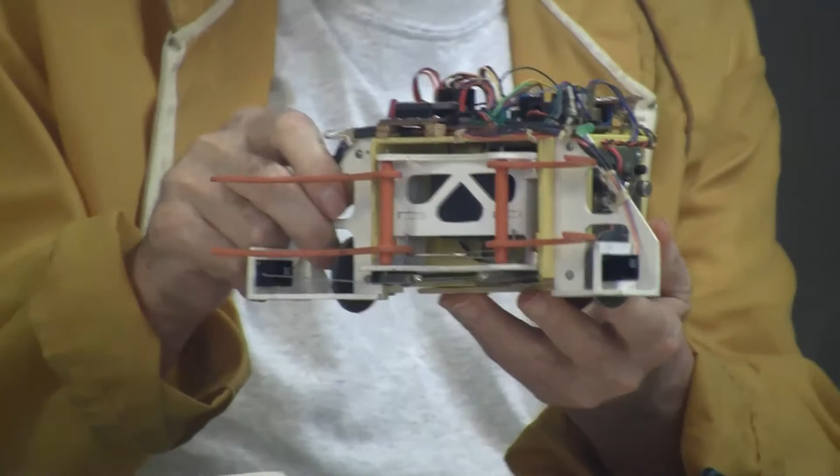It's a small robot, approximately 6 inches, about this big. In fact, this is it. I have modified it a little bit for other purposes, but this is it. It's primarily made out of plywood, and the reason for that is my previous hobby was designing RC airplanes, so I'm well equipped and knowledgeable in handling plywood. Besides that, it's easier to work with and stronger than plastic.

It's got 3 wheels, and the front wheel here is steerable and drivable, has a motor on it, which is a little different from most robots you see now that are differential drive.

There were several reasons for this. One of them is when I built this robot, I wasn't comfortable with trying to come up with a PID loop, and with differential drive you've got to have 2 PID loops. With this kind of arrangement, you don't really have to have a loop on the motor because it runs pretty much constant speed. I used an RC servo to steer it, so I sidestepped a lot of problems I would have had.

The drive motor, a little thing right here - I think that came out of a camera. I bought it from All Electronics.

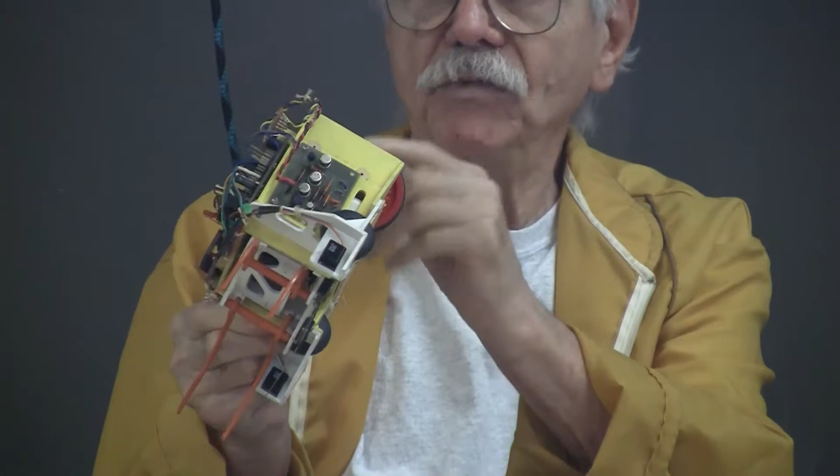It doesn't have an encoder on it, but I put holes in the wheel and have a pair of LEDs and a sensor, so I can at least do some kind of rough encoding.

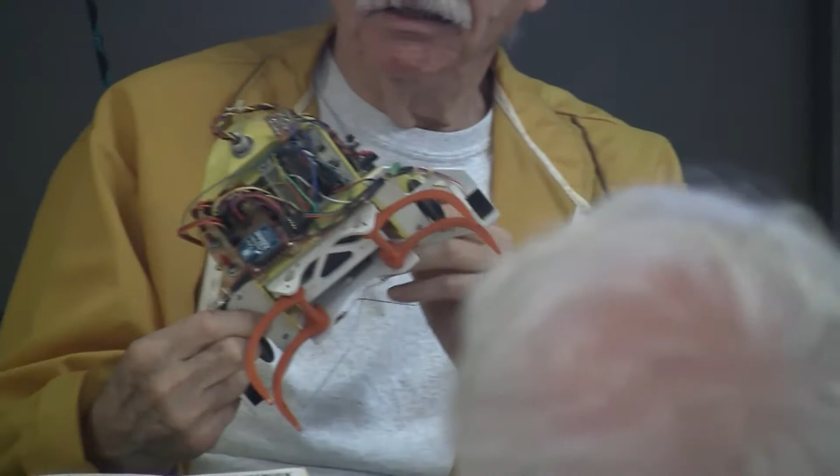It's got an H-bridge with some nice old metal can transistors on it. What's a transistor now? I'm kidding. It's not a vacuum tube?

No, I couldn't quite fit my vacuum tubes in here. As I said, there's an RC servo in there driving it. Power is 5 AA NiCads - there's a pocket under here with 2 of them, a pocket over here with 2, and then one across the bottom.

The brains is an Atmel Mega8 on a proto board that Dale Wheat was selling at the time. It didn't have a whole lot of horsepower, but the board could handle it anyway. It's programmed in C with an add-on that was available at that time to the club, called Atlan. I used a parallel programmer, which one of the club members gave me a schematic for, and I built it up.

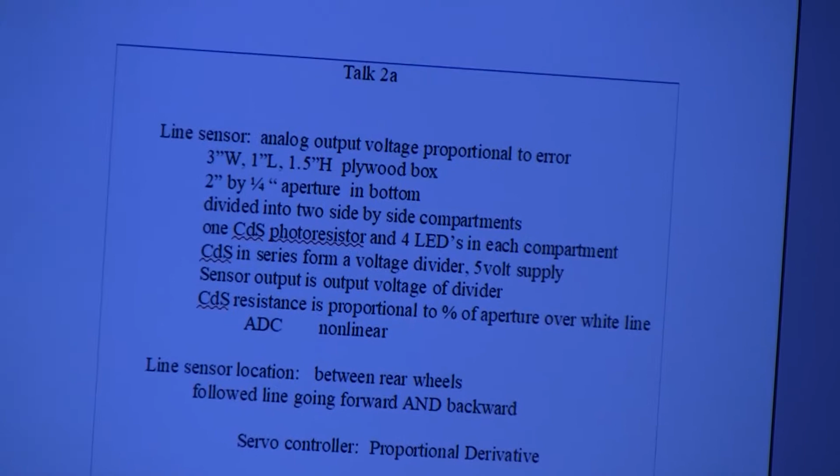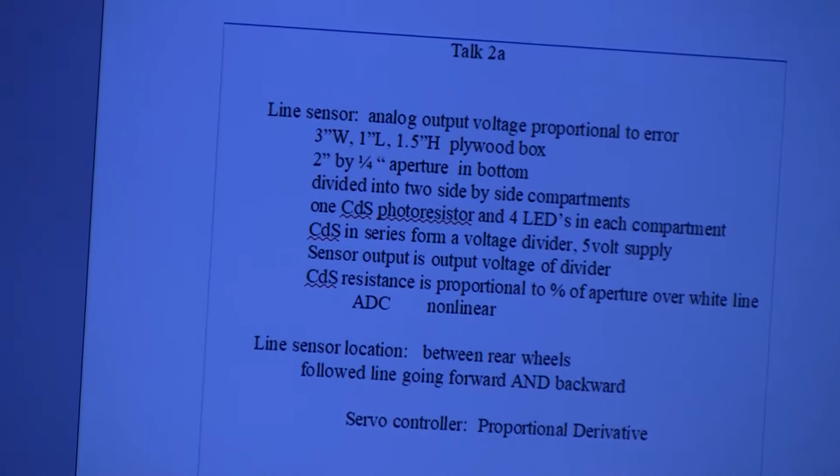The line sensor is kind of interesting, I think. I'll pretty well let y'all read what I said there. But that is the line sensor. My objective was I wanted an output that was continuously variable, proportional to how far I was off the line.

It has a little box divided into two compartments, and there's a cadmium sulfide cell in each compartment. There's 4 LEDs, with a separation between them. The LEDs illuminate the course, and depending on how much of the aperture on the bottom is on the line, that determines how much light is reflected, giving you an output.

Cadmium sulfide cells are hooked in series across 5 volts. The midpoint gives you the difference. It turned out it wasn't exactly linear, so I wrote an equation to straighten it out.

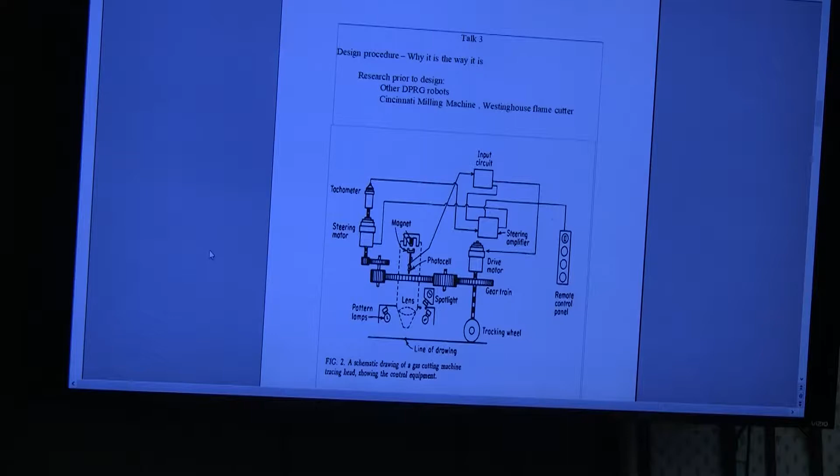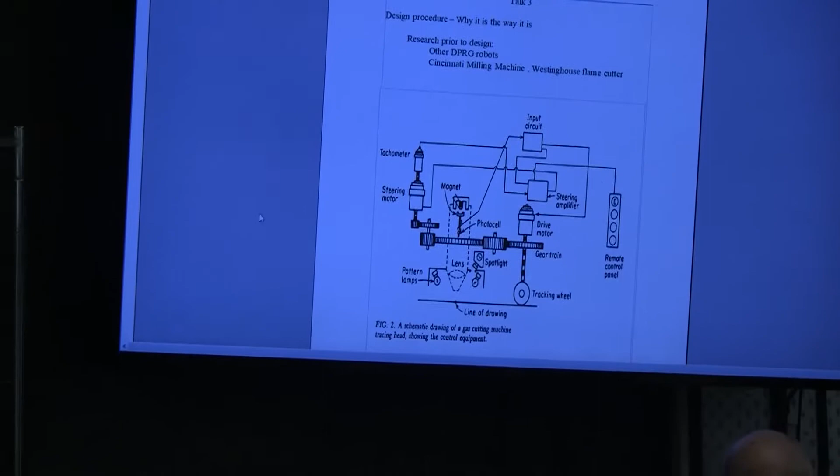Oh, that's tight, they'll come apart. There's no problem there. Anyway, I thought that was kind of interesting. So they would just draw a line on the part? They drew a line on a piece of paper, and then set it on the table or planted on the machine, and the machine followed it and actually milled a part. But the paper's separate? Yeah, like a pantograph sort of thing. So that allows you to freely do free-form design, kind of? Yeah, just free form. Nice, pretty accurate too. Yeah, it's pretty accurate. So this was back in, like I say, about

1955, somewhere along there. I don't remember exactly how they did it, but I thought they had a CRT that was generating a circular scan, and a lens projecting that down on the paper and looking at the reflection off of it.

I collect old magazines. I had a subscription to Control Engineering magazine back then, so I decided to see if I'd saved some of the old articles. I tried to find the article, but I didn't. I ran across another article for a flame cutting machine - they use a cutting torch to cut out steel parts. This was a design for how it worked. I thought that was interesting.

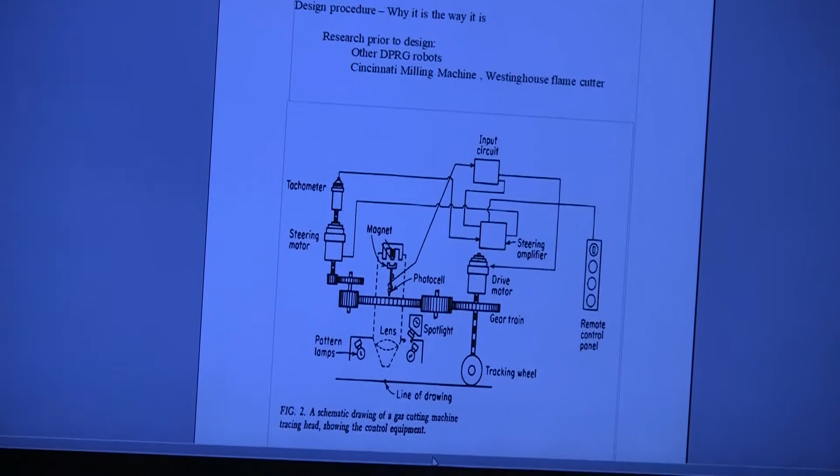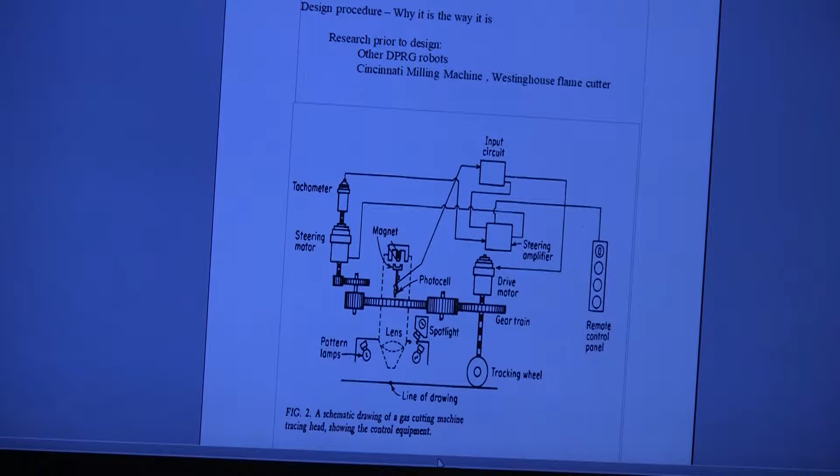Kind of off the subject a little bit, but interesting. You'll notice the servo motors back then very seldom used DC motors - they used two-phase AC motors. On a two-phase servo motor, you put a fixed voltage on one phase, and then a variable voltage on the other phase, and whether it was in phase or actually changed 180 degrees out of phase determined the direction.

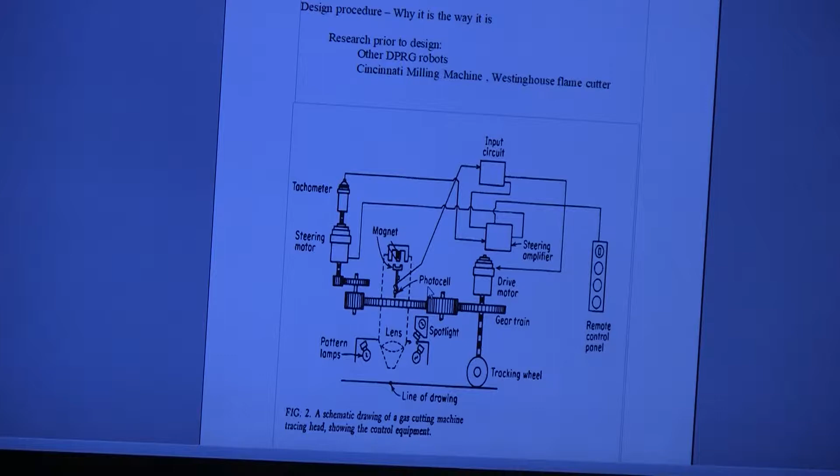Anyway, these had phase, and the interesting thing about this is the line sensor. Apparently there's a photocell with an arm that hangs down, with the photocell on the bottom of it, and there's an electromagnet up top which made it swing back and forth. Then there's a lens projecting an image onto the photocell as it swings across the line.

The interesting thing to me is how they generated that control winding phase. It turns out that if you got a symmetrical waveform and do a Fourier transform on it, you don't get any of the signal necessary to drive the motor. But if the notch moves off, it becomes unsymmetrical, and that introduces the control signal.

Also notice the steering motor's got a tachometer on it rather than an optical encoder. Here's another important difference: they're using a steering motor, which means the speed is more or less proportional to the error. Whereas on this servo, the angle is proportional to the error.

Most people use differential drive. As far as I can tell, if you use differential drive, to accomplish essentially what I have here, you have to have a velocity loop around each wheel. So you need a speed control on each wheel, and then your error drives the difference between those two speeds.

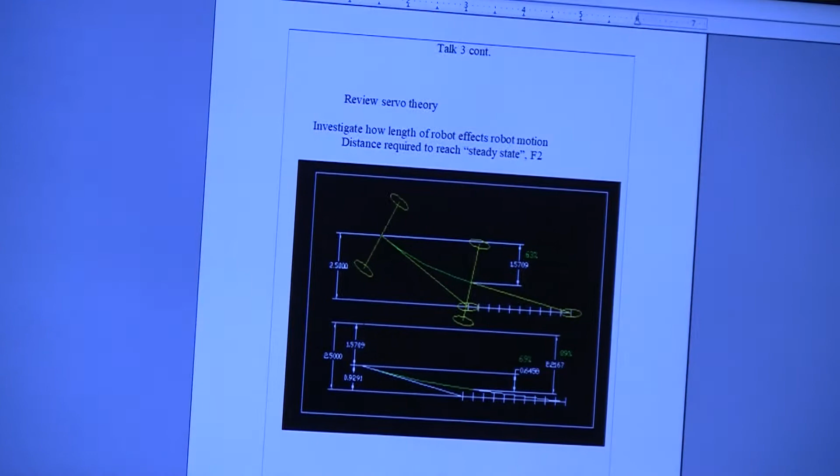Next slide. The next thing I investigated was how long should the robot be. There seemed to be an opinion at that time, at least by one member, that the longer the better. But I did a few things to try to understand what might be the better choice.

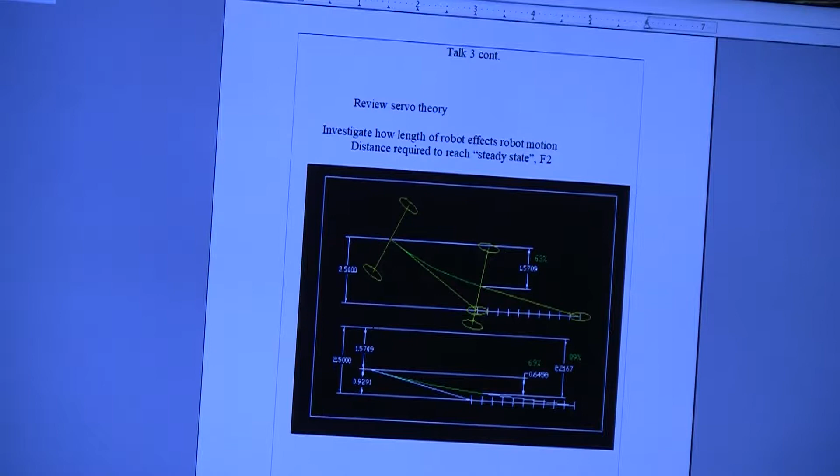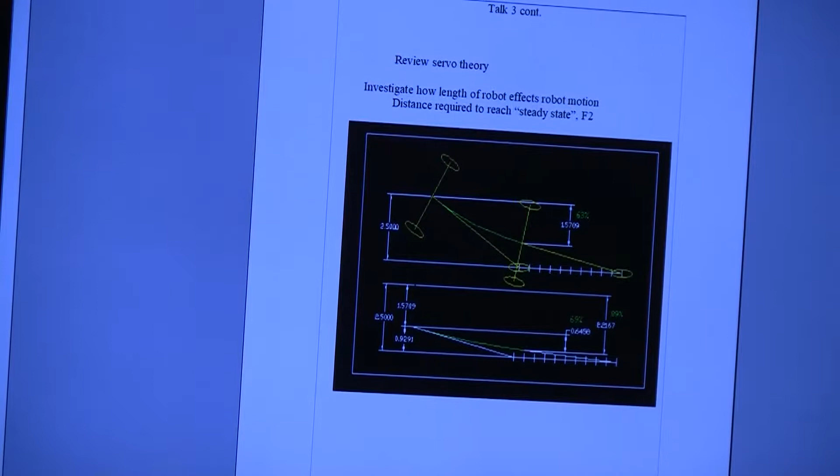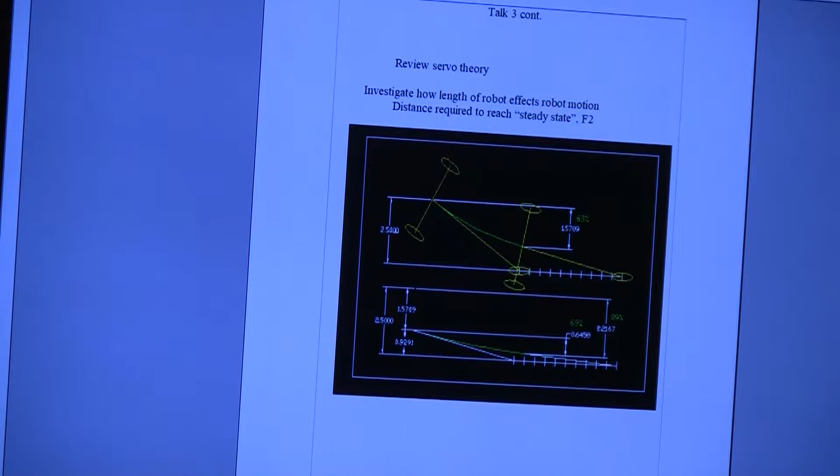One question I asked is: if I set the robot down where it's not on the line, but the sensor is on the line, and the sensor follows the line, how long does it take the robot to line up with the line? That's what this diagram shows. The top diagram shows the three-wheeled robot in a start position and an end position. The robot is 5 inches long, offset by half of that. The front wheel is on the line, and then the robot moves forward 5 inches, the length of the robot. The green line shows the path the robot takes, and you'll see it went about 63% of the way towards the line.

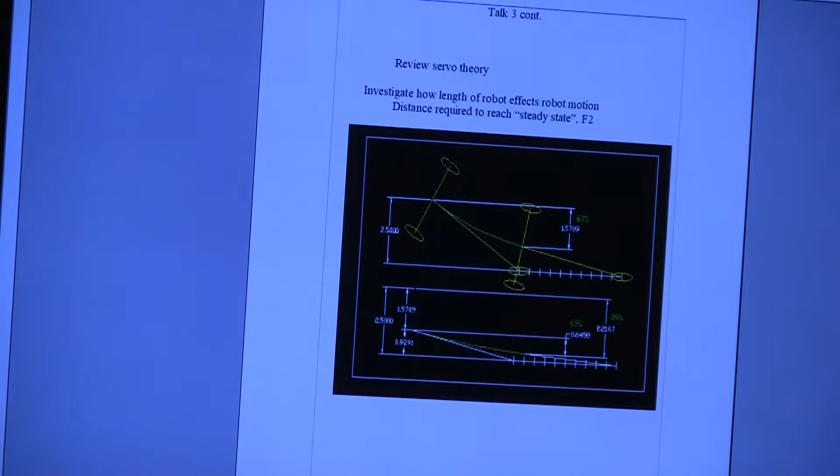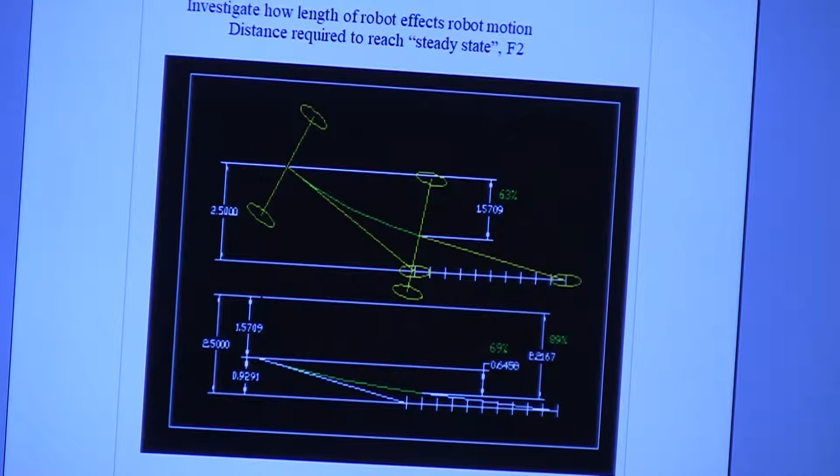The next diagram is basically just a continuation. In the next 5 inches the robot moved, it moved another 63% of what it started out with, for a total of about 89%, which says that if the robot starts out at an angle like that, it's going to be pretty well lined up when the robot has moved 2 lengths. I felt this was important because each time the robot came to a change in the path, from a straight line to a curve, that represented a step input to the servo. I felt it was probably a good idea that the servo settled out before it hit the next curve.

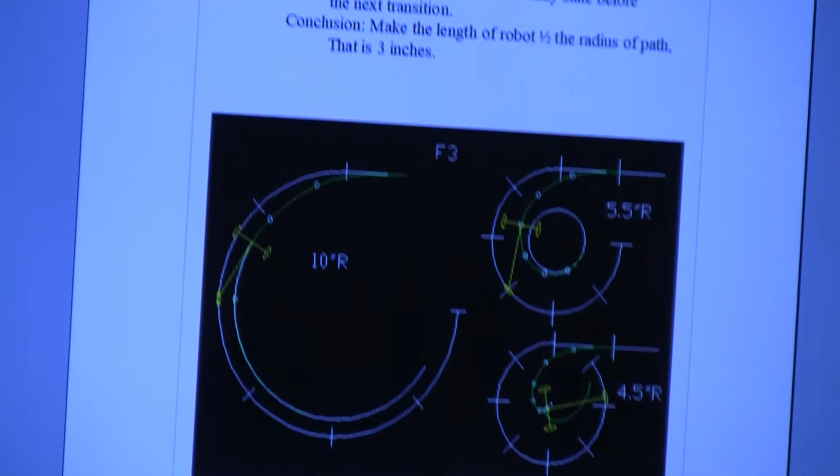So the next thing I asked is what happens when you go from a straight line to a curve. I drew this for several different radiuses. The big one here is a 10-inch radius, twice the length of the robot. It starts out straight at the top, and you can see the green line settles down to a circular path offset from the path. It settles down after roughly a quarter of a turn, thereabouts.

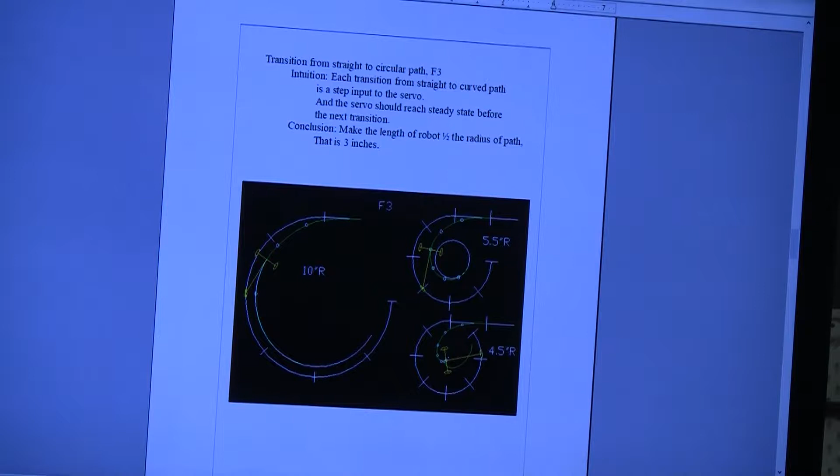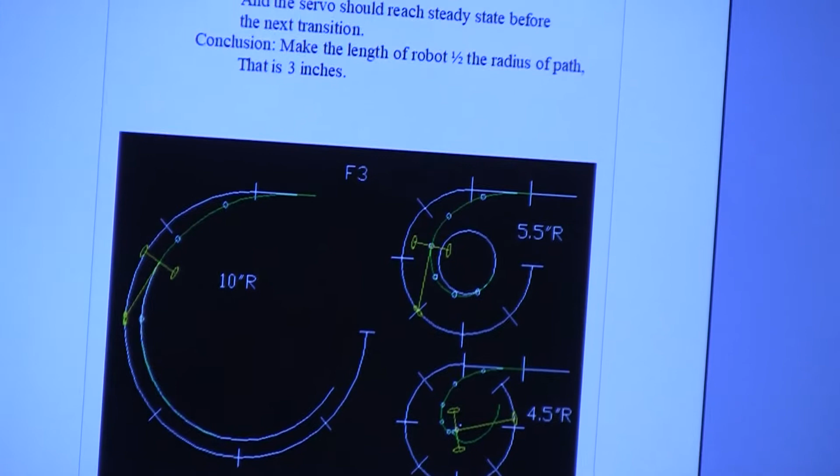The next smaller one is a 5.5-inch radius, just a little more than the length of the robot. It does settle down, but the robot has to go almost 3/4 of a circle before it settles down. Then the next one shows what happens if the circle radius is smaller than that. The answer is it kind of goes crazy.

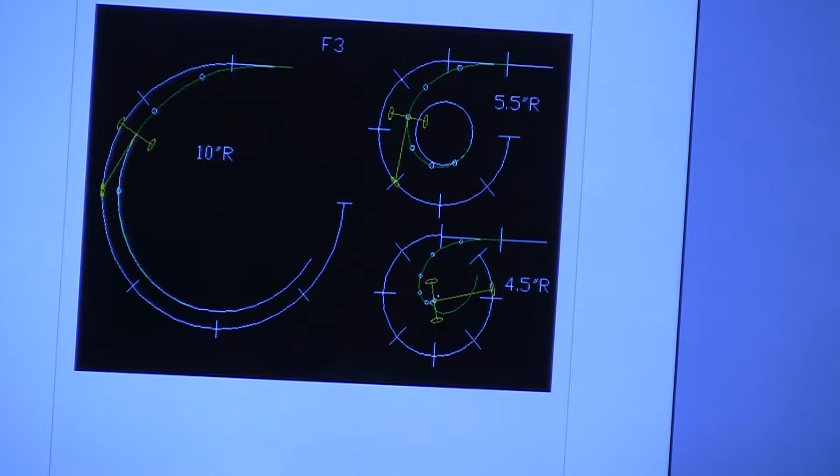In fact, you'll see it will go around until it finally gets to where the robot is basically perpendicular to the line, which is another important point. If you've got a line sensor that's a straight line, your line sensor is now not perpendicular crossways to your line, it's lined up with it. So basically, it doesn't know where to go. So I guess next slide, yeah.

These diagrams are great. I love this analysis. I'm just curious, how did you draw these, or how did you get these graphs? It's a trade secret. No. Well, if I was a guru like this guy, I'd simulate it. And since I'm not a programming guru, and at that time particularly I'm not very much a guru, what I

did is I got me a piece of wood. Excellent. And put my wheel on the back of it, a stick on the front of it, and I drew me a path, and I held it on the paper, and I followed that line with my pointer and watched what the wheel did. That's a simulation, by the way. Yeah. That's beautiful. So actually, I did that a long time ago. And I lost it.

So I built another one. This time I got fancy. I actually made a triangular shaped piece of wood, put two wheels on it, and a nail for it. And then I drilled a hole and put a pencil in it, so I could put it on there and trace it around. Draw the path. Anyway, that's how I did it.

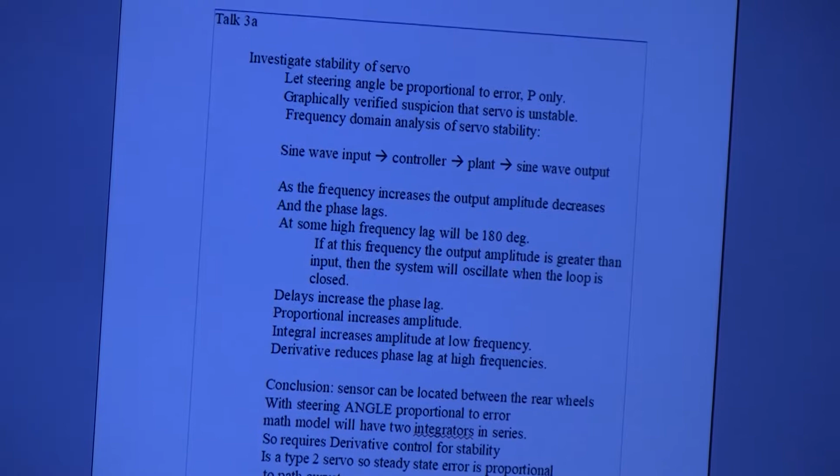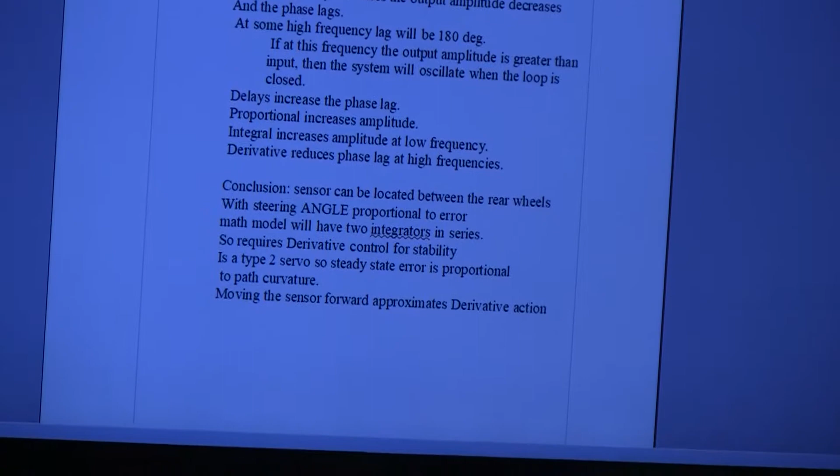I'm talking. All right, the next thing I began to think about is basically the stability of the servo. Would it oscillate? In other words, if I made the angle of the steering proportional to the error, would the servo oscillate? And I suspected it would. And so I graphically determined that it was unstable.

And for you, Clay, the way I graphically determined it, I got on AutoCAD, I drew this robot there, and I said, okay, it moved in the direction the wheels are pointed. So I moved it a little bit, I drew it again, moved it a little bit, drew it again. And I started off, I think I had a curve.

And it went along here, it closed in on the curve, it overshot the curve, it went beyond the curve back, and overshot, and each time it overshot, it got further away. Yeah. Oops. So I figured, well, it's probably going to be unstable. All right, so basically, what I did

back in the 50s when I was in college, I took a servo course. I'm not sure I learned a whole lot about it, but I got a book out of it. And so I sat down and kind of reviewed the book as best I could. And back in those days, it was talking about frequency domain analysis. And for at least one of you in here that doesn't know what the frequency domain is all about, the reason I want to mention this is because I think it brings out a couple of points that are kind of interesting.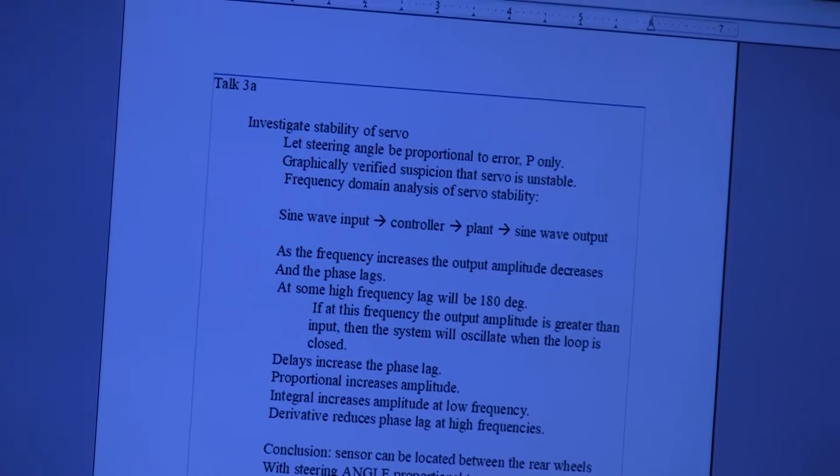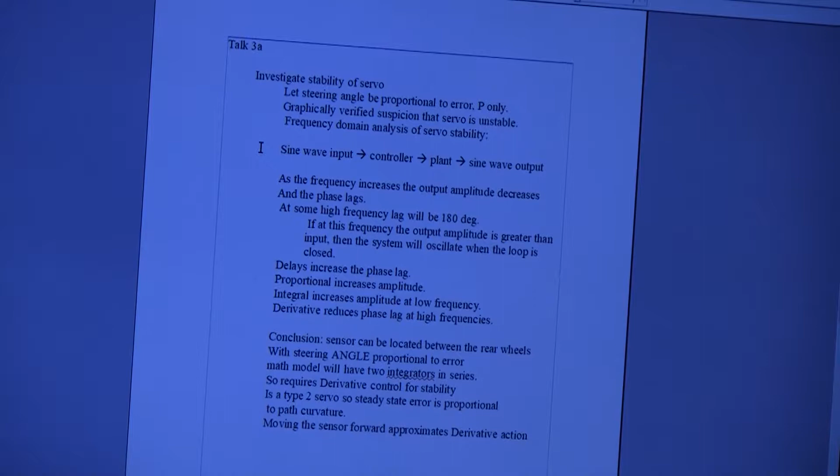Basically, one of them, poles and zeros. Yeah, there's a line there where I've got sine wave and error and a controller and a plant. I tried to draw a box around the controller and plant, and I wound up erasing my work. Yeah. But anyway, what I'm trying to show there is, if you take your servo or your plant, by the way, plant's a fancy word several people use for the actual robot, the mechanics of it.

Okay, if you have the actual plant, put the exact robot controller in front of it, and you took a signal generator and fed that signal into the closed loop system, but you broke the feedback loop, so it was open loop. So you feed the sinusoidal signal into it, and you look at the signal coming out. The signal coming out is going to be the same frequency as what you put in, but it's going to be a different amplitude, and the phase is going to shift.

At low and medium frequencies, amplitude will vary around and everything, but eventually it starts nosediving. As it starts going down, the amplitude goes down, and the phase shift lags further and further behind. At some frequency, the phase shift is 180 degrees. So when you connect the loop, what you thought was negative feedback becomes positive feedback. It's an oscillator. So you want the amplitude of the system to be less than 1 when the phase goes to 180. So that's the concept of frequency.

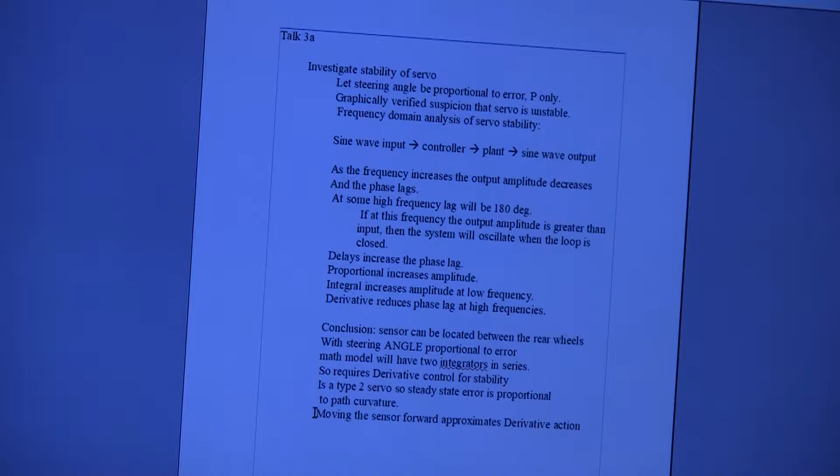Let's see, where am I? All right. So I guess my conclusions were basically, it should be possible to put the sensor between the rear wheels. And let's see, what else did I include? If you make the steering proportional to the error, you come up with a Type 2 servo.

Now, what's a Type 2 servo? Well, basically, one of the answers is how many integrators do you have in it? I've got two integrators, so it's a Type 2 servo. But there's the other kind of definition of a Type 2 servo. A Type 0 servo is if you have a constant input, your servo requires a constant output. There's a little error, a constant error.

In other words, if you're trying to heat the room, you've got to have a little difference to keep the furnace on. So a Type 0, there's a constant error if the input is constant. A Type 1, you have a constant error if the input is a ramp, linear. And a Type 2 is that you've got a constant acceleration. Well, it turns out that going around a curve on the course is a constant acceleration. So it says it needs to be a Type 2.

The other thing is just looking at the robot. It says if I'm going to go around a curve, I've got to maintain a constant steering angle. So if the steering is proportional to error, I've got to have an error. So basically, all of that says it's a Type 2 servo. And that's why I call it T2LS. Yeah. Type 2 linear servo. There you go.

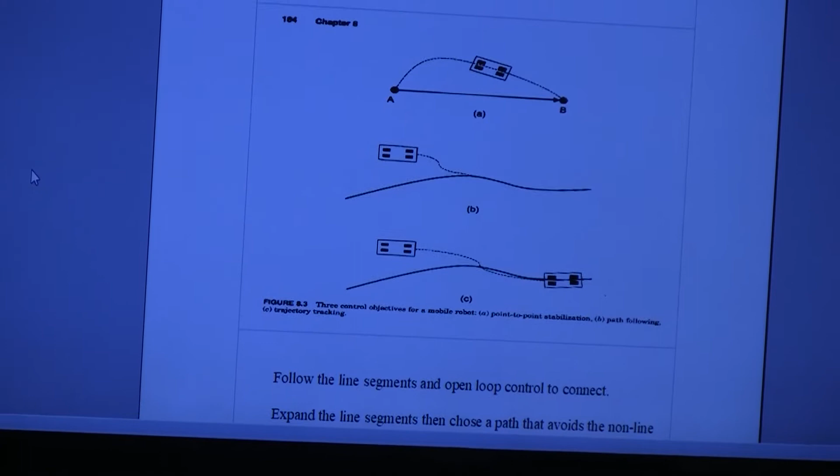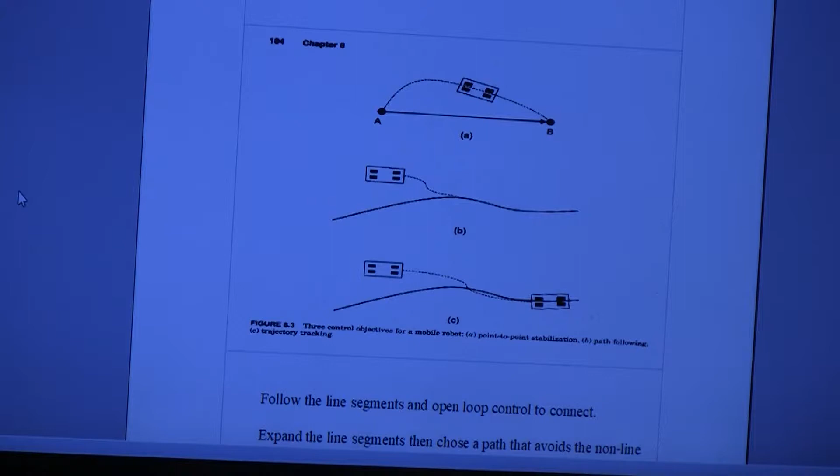So basically my point here is the DPRG course is not really a line follower. The closest name I can come up with for it is a route follower. And what's the difference, what is a route? You go from here to there, kind of follow, but you don't necessarily follow the line or a particular track. So basically the question is, what do you do about it? How do you handle this problem? What capabilities do you have to incorporate into the robot? That's the subject of my speculation.

In this book here, which, by the way, is an interesting book. I found a couple of what I think are stupid errors, so I kind of need to question some of the things. I think it was written by a professor and one of his students, so maybe the student part. Show it to the camera. Can the camera see? Mobile robotic car design.

But it's pretty interesting. It does have a more complex model for the robot, and it also talks about when you use a camera to detect the line, how to transform it back. To be honest, I haven't read that part, so I don't know exactly what it's saying. Anyway,

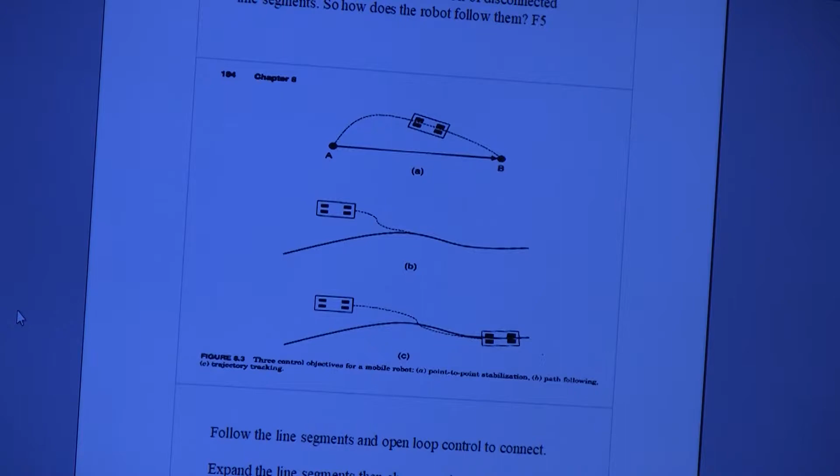they made the point that there's basically three different ways to get from here to there. One is just a waypoint: the only requirement is you start here and you wind up there. The other is basically following the line. And the third one is where you're trying to track something. And if I'm not mistaken, I think Carl basically took the first approach. He set a bunch of waypoints on his line, and then moved to each. Am I wrong or right?

Sort of. Well, it's more like a combination of A and B, because the camera would look at the scene, and then based on that scene and recent scenes, it would say the most appropriate place to aim in that current image is here. And at that point, it would shut its eyes and then just attempt to go some fraction of that heading. So basically, you're doing the first.

As much as you can. The first was how the commands were given to the wheels, but the determination of where point B is relative to A was more like B or C. Okay. Well, anyway, the one point is you determine the waypoint, and then aim your robot and go do it. That's one approach, and that works even though your line is not continuous. It's got sharp corners, because you're just going. But it's difficult to figure out where it should aim.

Well, that's hard, and I would guess it's probably some kind of first order loop, right? There's no deterministic algorithm for the control loop. Once you set the point, it's ballistic. No, you can servo it to that point. You can close the loop around it. Then the last one there is similar to that, except instead of your target jumping like that, it continuously moves. And in both cases, the robot doesn't necessarily follow the line.

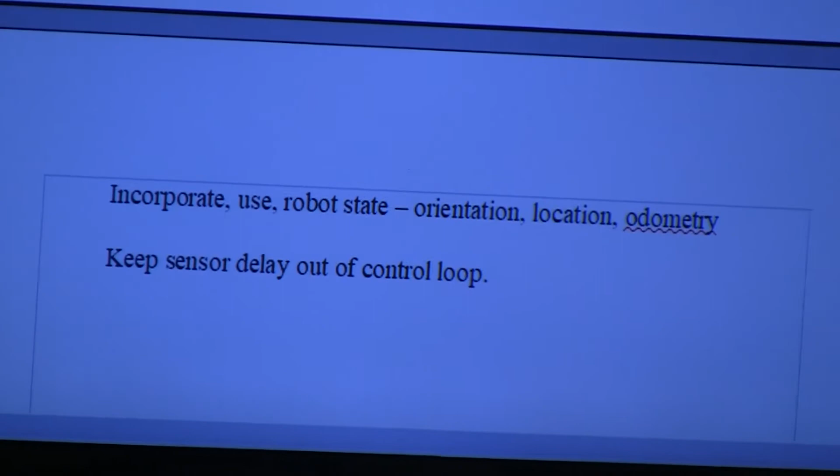It's just a little description of what it is. And really, what Will's proposing there, if I've got it right, is if you did have a model of the course that you're referencing - sort of like Tesla car driving, where you've got GPS information about where the roads are - it's not a trivial task to do what Will's talking about, which is look for what did you call them, landmarks, and correlate your model with what you're seeing and where you are and all that. That's a good problem to solve.

And that's what's being done in these self-driving cars. They're not just out there driving the roads. They're weighing up what the GPS is telling them and looking at their road map. And if there's a discrepancy, I'm sure they get nervous - you know, Google says the road turns left here with such and such a radius, and I don't see it. I'm probably going to put the brakes on.

Recalculating, yeah. Anyway, that's what's fun about this. And what I'm just saying is, when we first started this path, this journey with the challenge course back in 2011, I don't think anybody thought it was going to be as hard as it was.

I thought it was hard because it didn't look like something that could be solved right away, and I'd rely on being able to sit down for a few days. Otherwise, go back to it after a year or whatever. And I just wanted to make an observation.

One of the things I love about the club is a really great presentation that morphs off into discussion, which is really interesting. The other thing I'd say too is that there's a lot of different people going at it in a lot of different ways, and I think that's good too.

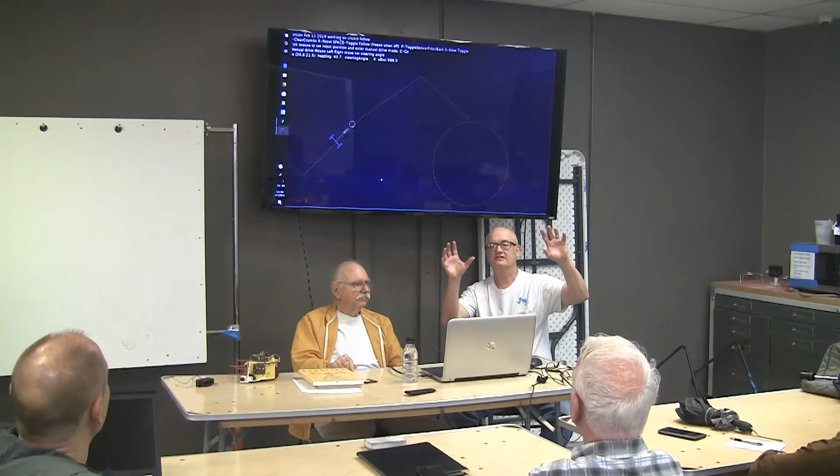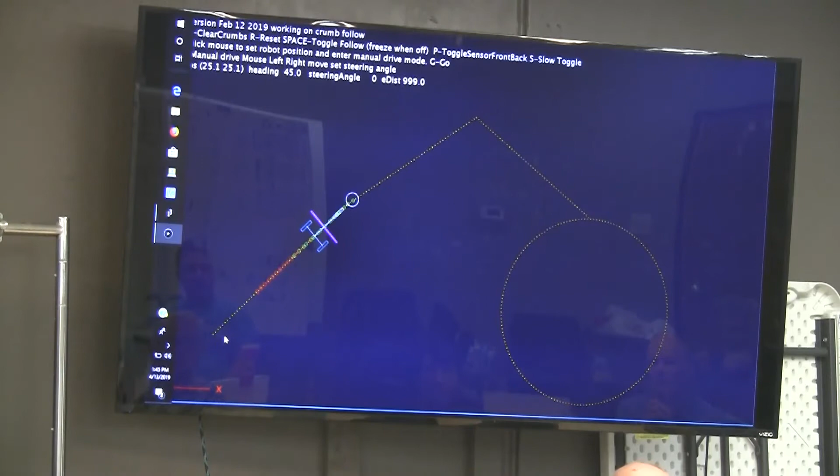That makes sense. And that line, in this diagram—when I reset it, you'll see green little circles. Those are the camera-sensed cookie crumbs. Can you tell us what this is written in? Processing—I published it to my GitHub, so you can pull this and look at it. I was going to talk about it, but I don't know if we'll have time today. So the crumbs are the line? The green ones, yeah, are the cookie crumbs, and that circle is sort of the detector, which is like maybe a video camera.

But the magenta line that you're seeing across the robot, that's a virtual sensor—let's see if we're tracking at the moment. Hang on, let me reset, I slowed it down. Okay, hang on, let's see. Oh, maybe because I'm going slow. But that magenta line is a virtual sensor. So, are we tracking? No, hang on, okay—it runs as well as your robots, Ron. It's a good simulation. Yeah, perfect simulation. I know, the space bar toggles follow.

So what's happening is that you can see the camera is picking up the line way out in front of the robot, but we're dropping those crumbs into a world coordinate system, which we know where the robot is in. And those magenta dots, the sensor doesn't actually exist there, but it's our virtual sensor in this case. You can place that anywhere, between the wheels, wherever you want.

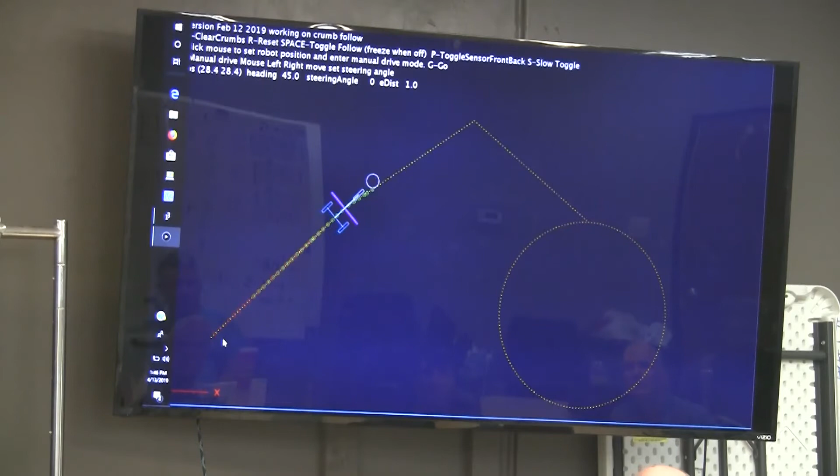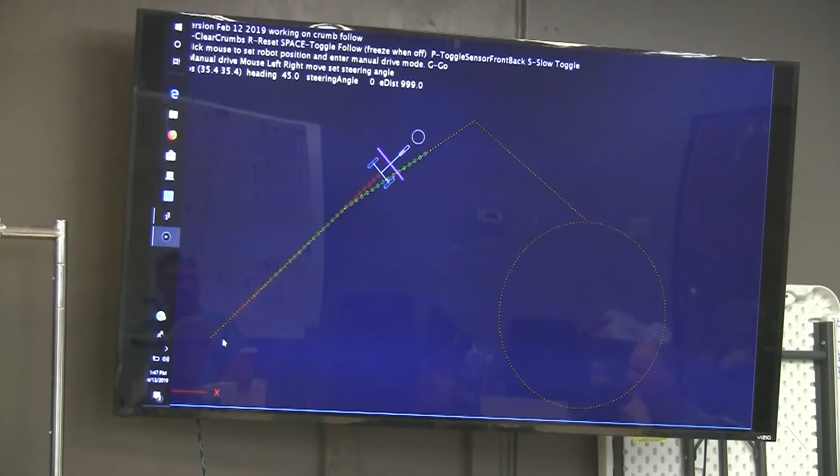Wait a minute, the robot's spazzing out. The robot went away, but the dots kept falling. Wait a minute. I'm fading, okay, it's a little tough for that. You get a loop issue, kind of a hard bend there. Let's see, did I add any gain onto the turn? Slow it down, hang on. He's lost it. Just a few more adjustments to the code, hang on, let's see. It needs some more D in that thing. Yeah, crank up the derivative.

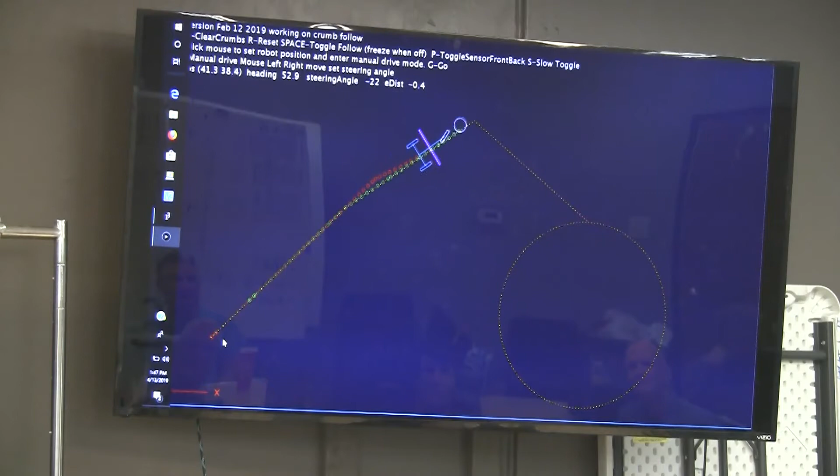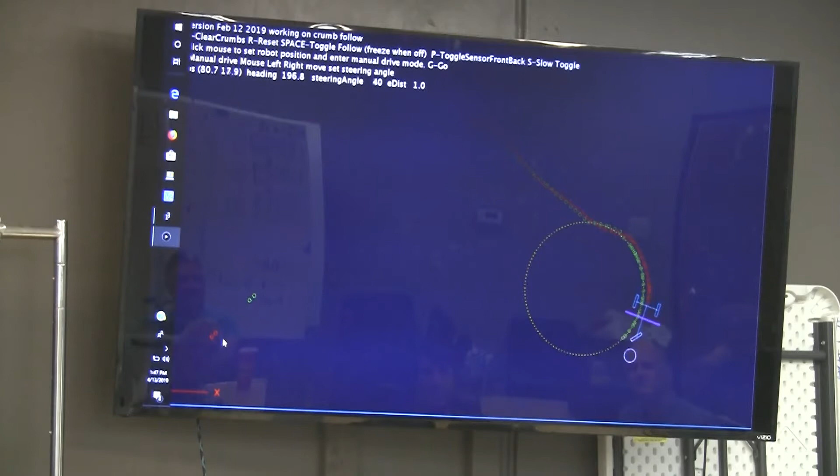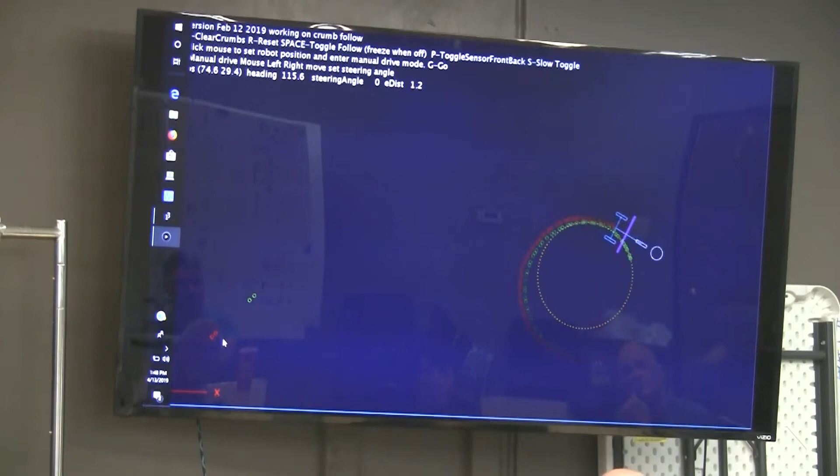In other words, the detected crumbs are dropped into the world coordinate system. Imagine as if you literally dropped a cookie crumb where that camera was seeing. And then the sensor back there gets to see those cookie crumbs. You don't have to do it in reality - like Will was saying, invisible lines aren't bad.

But isn't the circle what the camera is seeing, the line? Yes. I'm confused there - so as you're going around this spiral here, the camera hasn't seen any of the cookie crumbs, so how? No, no, what it's doing - sorry, it looks a little confusing. The circle, we're computing the nearest point on the line, we'll say, which is the yellow dots. The nearest point - hang on, let me reset the thing.

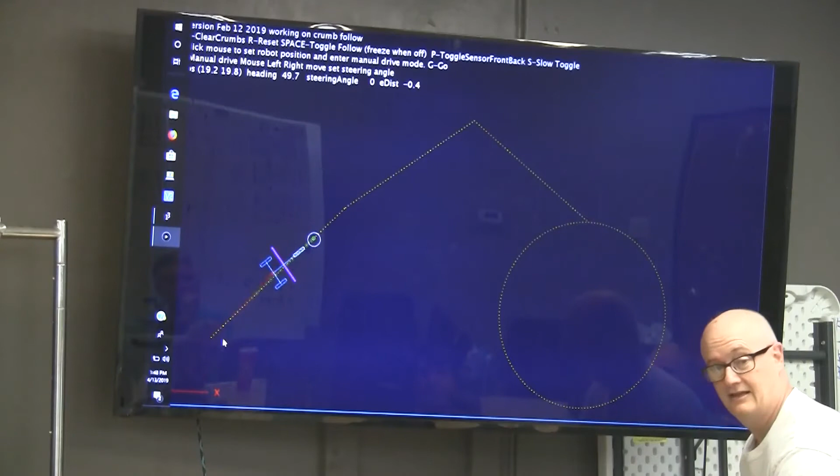Okay, so in other words, I'll freeze it, let's see. Just a second, let me just point - the line is your sensors, right? Yeah, so anyway, these yellow dots indicate a line. Now we could get cute here and draw a physical line and physically process the image or whatever, no big deal. But so for this illustration, the yellow dots indicate where the line really is, and that we'll say is in world coordinates.

And I'll say something here in a second, but right now, the closest line point to this circle is that right there, and there's the green dot. I'm now calling that a cookie crumb. But that cookie crumb, we calculate based on where the robot is. The robot - and this is a little tricky - because we put it in a world coordinate system. The problem is, as the robot drives along, because odometry isn't perfect, a robot driving around in this room might slowly build up error.

But with respect to this, what's really important here is the camera sees this point, and this point is 10 inches out in front of the robot. The cool thing is that if the robot thinks I'm here at, I don't know, 0, 20 or whatever in the XY coordinates, and 10 units out ahead is that cookie crumb, it can now position that in the world coordinates, and it's pretty accurate - real accurate, in fact.

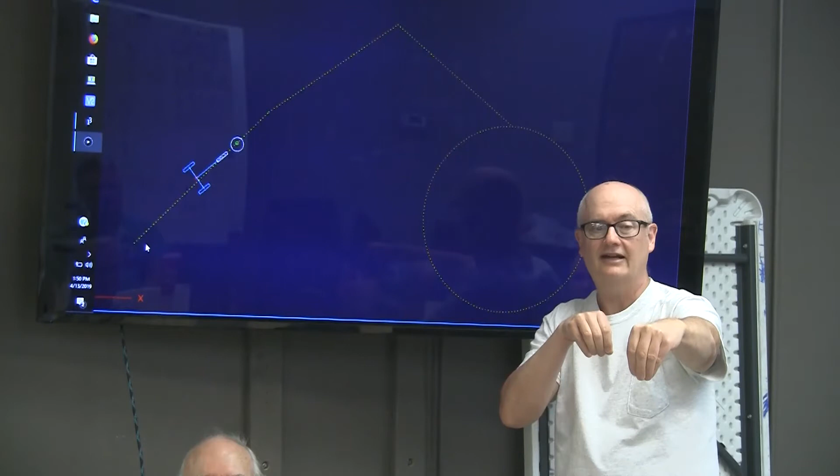And what we're really worried about is just for the time that that robot is going to drive about the next, we'll say, 6 inches, is what really matters. Yeah. And so what we're doing is we're able to put a point and know exactly where it is with respect to the robot and drop it into a physical list such that we can drive along and follow those virtual cookie crumbs as if they were real, because for all practical purposes, they are. In other words, we're storing them in memory.

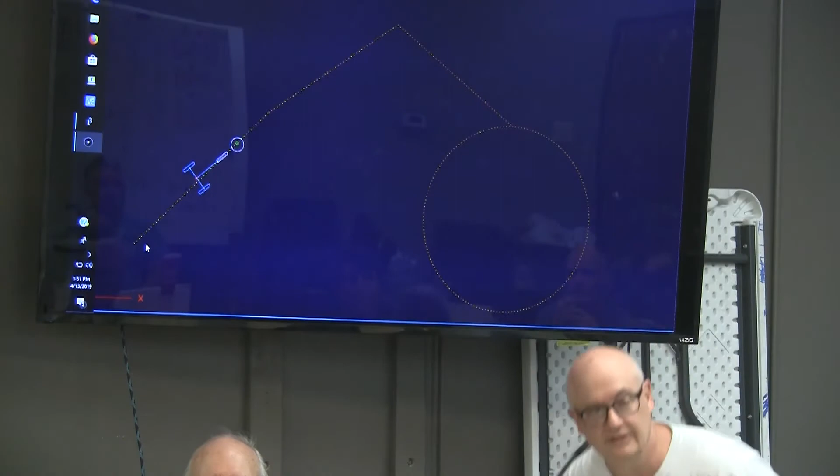It doesn't matter. Okay. Now, does that matter? Let me put it a little different. The robot is detecting the line out in front. Yep. And it's doing it in robot coordinates. Yep. But the robot knows its position in the world. Yeah. And so that point is transferred to world coordinates. Mhm. So it's now stored that point in world coordinates.

The robot moves, detects another point, stores that point in world coordinates. So it's creating a map in world coordinates. Then the robot is moving, the virtual detector back here is taking that line. It's stored in world coordinates, converting it to robot coordinates. Well, not this program, but that's okay. You could do it that way. Converts it into robot coordinates and then sees how close the robot is to that line.

Now, if I understand, what's the sensor up there in your picture? That's the purple one. There's two sensors. The one in front is kind of hokey, let's put it that way. Okay. Well, I could show you this in a real beautiful OpenGL 3D simulation if you want to see that. No, but where is its field of view?

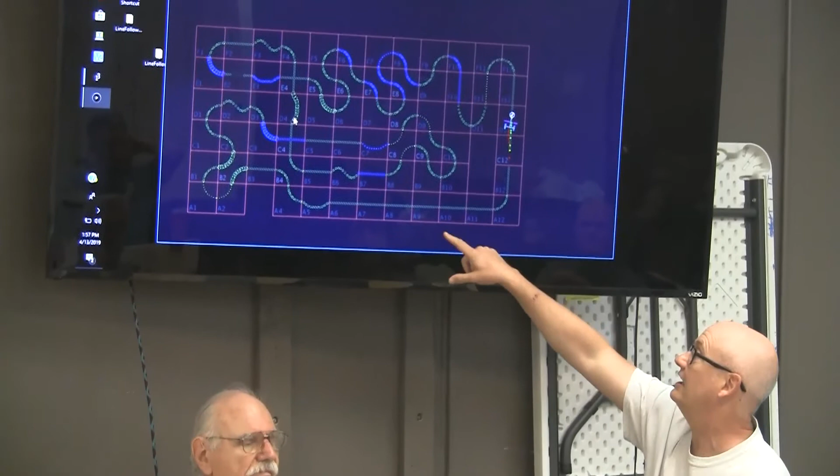Now, the other thing is perceiving where we think the path should be, because obviously I've idealized, like the S curves, I've faked them a little bit. I've made them into something that's more followable, and Will made a perfect one.

Running out of time? Well, no, what's going on? No, you got plenty of time. Well, let me see. Oh, okay. Oh, you need to go. Yeah, I got it. See you. Thanks a lot. Oh, you bet.

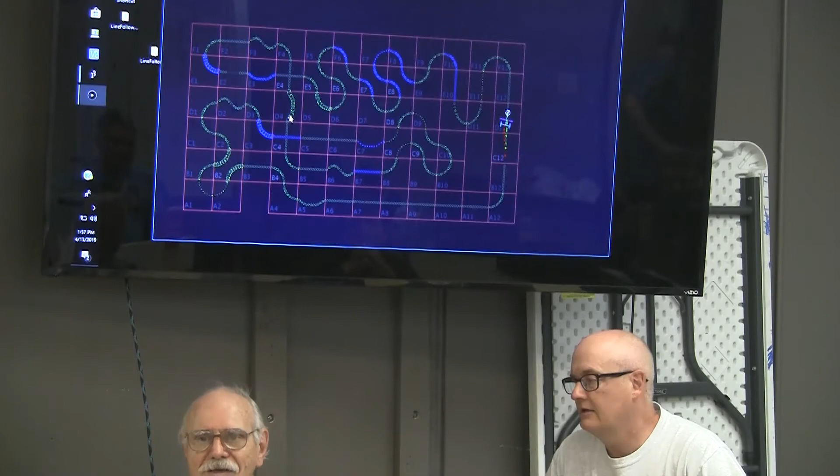This sensor that he's got in front, in my opinion, it's hokey. But what I've started messing with, and I don't know how well it'll work, is a line sensor that's an arc. And I think it needs to be close to a 180 degree arc, a half circle, with the center of the arc approximately at the virtual center, the turning radius. So that the distance from that point to the virtual center is basically the same. And this curved sensor then moves along the line.

Most of the time it crosses the line once. But there are cases when you get an acute angle, and it actually crosses the line three times. But you're only looking for the one closest to the center, because if you just plot that one, the closest to the middle, when you come to that point with the curved arc,

It'll close up quickly. No, it won't. You got the one over here, but the first one out from the center is the closest point on the line. They're both on the line, but the first one on the arc is the first one you come to when you're going on. I think basically that. Okay.

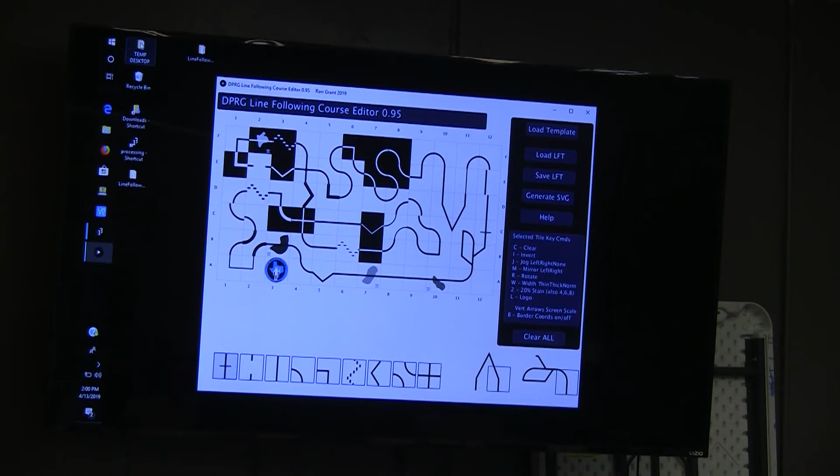That's cool. And I guess where you have a gap, you just keep going. Yes. Well, that's the ideal way, because that's part of what you do. Your internal map will have a gap in it. But one of the things you know is that they're kind of spread in time. So all you really want to do is put some points that connect it in your list that are not spaced too far apart. And that brings up the question, how do you store the internal map?

This program basically treats it as a bunch of points, XY in known world space. Or robot space. Or robot space. But then you want to get more sophisticated and have a continuous line.

You know, if you did have a sensor that was like an arc, like a radius of 180 degrees, I think that would work at catching all those acute angles easily, because you could come up and it would just shift from the center sensor off to either the left or the right, but it would still sense it. It's not like it would all of a sudden be there and then disappear, if you had sensors all in a line.

That's a neat thing. I wonder if we could do that with our cameras, though. That's a little more difficult. Yeah, no, that wouldn't be hard at all. To sense, I guess you'd have to do line segments, or specific pixels. You'd have to put the camera above. Well, you can do the camera above with perspective correction, like I do, and you could get an arbitrarily shaped sensor curve with a mask, I guess. Oh, that's true. Just make a mask, and then boom, you're done.